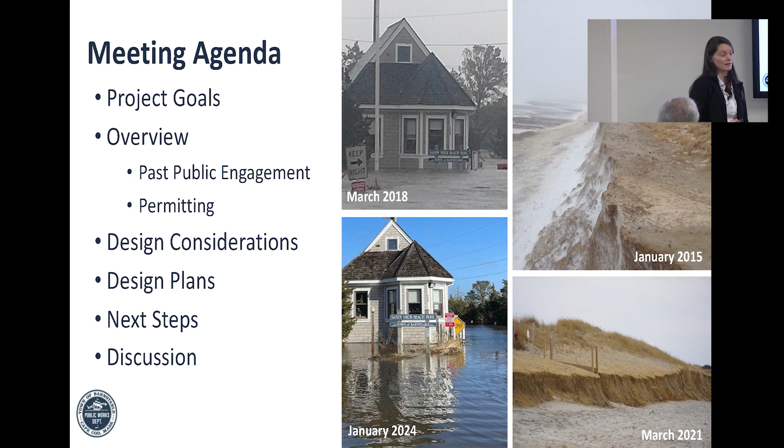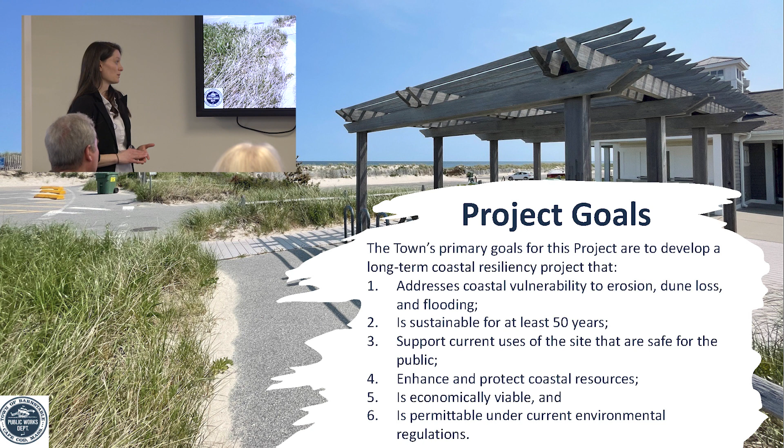So the project goals: the town's primary goals for this project are to develop a long-term coastal resiliency project that addresses coastal vulnerability to erosion, dune loss, and flooding, is sustainable for at least 50 years, supports the current uses of the site that are safe for the public, enhances and protects coastal resources, is economically viable, and is permittable under the current environmental regulations.

We've had a lot of public meetings on this project. This is our 4th one so far. So what we started with was a review of the site's vulnerabilities and constraints, and then we established those project goals I just mentioned to you.

At that meeting, about a year ago this past January, we presented 3 conceptual designs with different alternatives that address the vulnerabilities on the site. One was a stone revetment, one was a partial reconfiguration of the parking lot where we pulled it back a little, but not enough to make it sustainable for 50 years. And the final was a full relocation where we pulled the parking lot back to make it sustainable for at least 50 years against future erosion events and flooding.

Moving from that meeting, we got a lot of comments, largely about traffic flow on the site, where the gatehouse was located, and screening of the parking lot and the way car lights would be facing. Also in that original plan, we had proposed to move the ORV trail from its current location up to the back side of the parking lot. That was something we got a lot of comments on, questioning if that was really a good idea for the project.

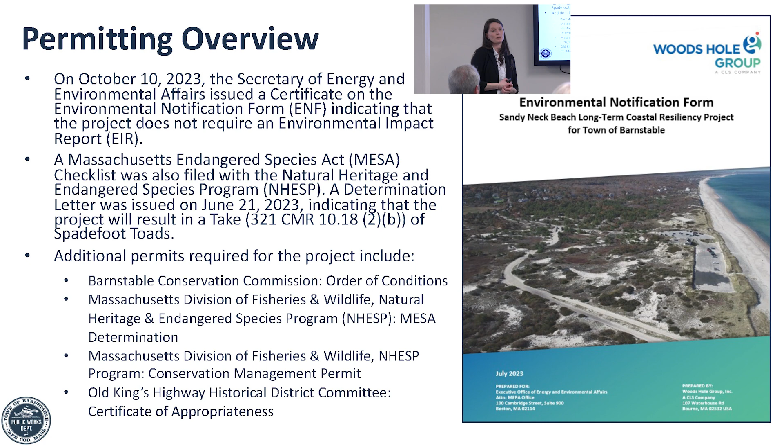So the design considerations for the project at this phase were focused on enhancing pedestrian safety throughout the site, improving vehicular traffic flow throughout the site and particularly the lot, trying to optimize parking spaces to the extent that we could, reducing the amount of impervious area from the last plan we proposed, and decreasing impacts to areas that haven't been disturbed by infrastructure on the site at this time.

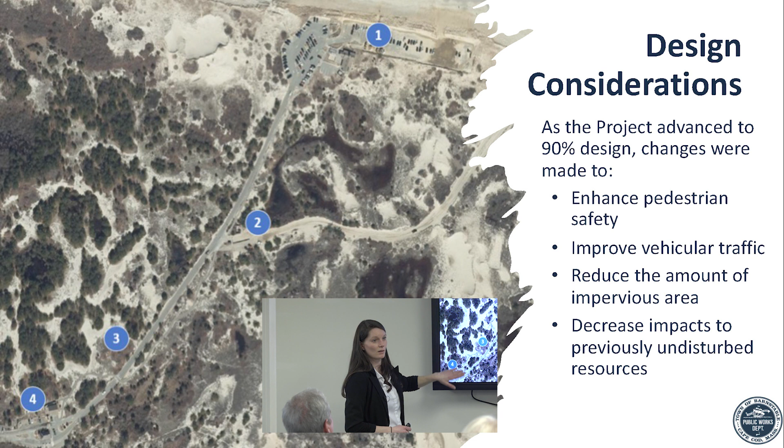The numbers on this aerial photograph just show you the areas we're focused on as part of this work. We have the parking lot up top, the existing ORV trail. This is the area of the proposed new gatehouse, and then this is our existing gatehouse area where there'll still be parking in the maintenance garage.

So this is the latest and greatest of the design plans for the upper parking lot. You might think it looks largely very similar to what we presented last time, but there are a couple details that have changed. Starting in the lower lot real quick, the orientation of the spaces in the lower lot hasn't changed.

But we have proposed in the 2 spaces that run along that green line, the vegetated bioretention swale, which is for stormwater and addresses our Lake Sandy Neck that we have today. It has pervious pavement that will be in those parking spaces, and that's actually something we added as a result of the MEPA permitting review.

Overall, our project was increasing impervious area on the site, and they said, we really want to see you make an effort to mitigate that impervious area with more pervious area. So by adding this pervious pavement, it absorbs the stormwater like pervious ground would. That was something that came out of that process.

Just sticking with the stormwater real quick, we have that bioretention area behind the lower lot. It's meant to take the additional stormwater flow that the swale can't handle. It'll pipe it over to that area so that area can take the additional stormwater flow. It was larger in the last design, but we were able to reduce its size, largely because we are incorporating pervious pavement within the parking lot.

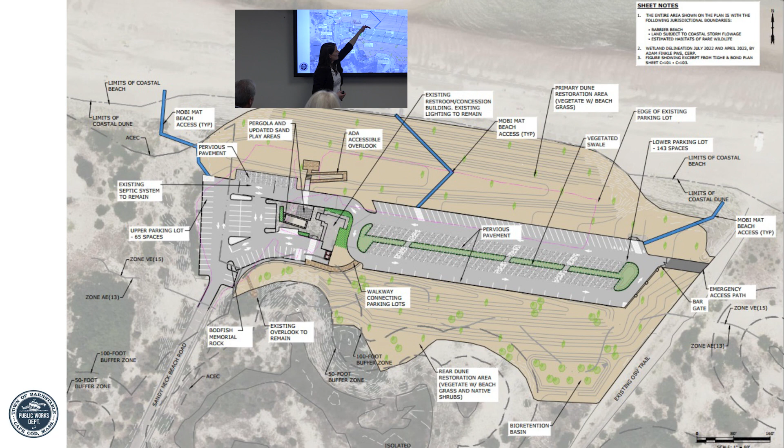Initially, we weren't proposing that because right along this parking lot edge is what we were calling our 50-year limit of loss. That's what makes the project sustainable for 50 years, not losing significant portions of the parking lot to the ocean before then.

So we proposed that because it gave us essentially a traffic pattern that is very similar to our current lot. You drive in and you can go in a circle, or you can go down to the lower lot, come back up and out of the park. It's very similar to what we have today.

And we talked with all of the project team members and some of the regulators and said, hey, this is what we're thinking. Do you think this is not a good idea from the project standpoint? And they actually all preferred it because it had less impact on the site and was reducing impervious area created from this project, so it was viewed as a benefit. But we're also proposing some pervious pavement in that location.

The existing area, pergola, and sand play area around the bathhouse is actually growing in size a little bit as a result of this project, because we were able to move some of these spaces away from that area and create a slightly larger sand play area and patio around that concession stand area.

In a previous meeting, we had heard comments about how pedestrians would get from the lower lot to the upper lot. We were able to add a sidewalk, a boardwalk that will go around the backside of the bathhouse and bring you between the two lots in a safe manner. So these were a lot of the changes that occurred as a result of the permitting process.

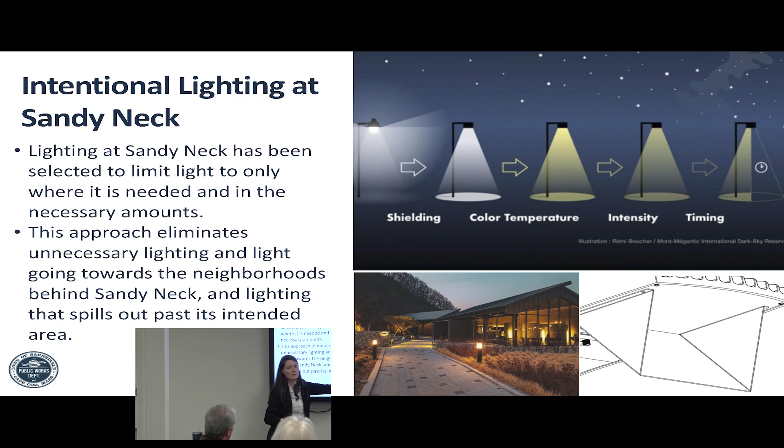So those are the lights we're proposing, along with some light bollards along the raised crosswalk, just to provide really low-level light. Those bollard lights face down towards the ground, just to light up the walkways people might be walking through, similar to these lights shown in the pictures.

So next steps for the project. Taking your comments now, but then ultimately we're moving forward, going to file a notice of intent with the Barnstable Conservation Commission and keep working through those other permits that we need to receive.

By May, July of this year, we anticipate having the 100% engineering design plans and getting our order of conditions for the project. Kind of fast forward after that, we'll be looking at construction phases.

We don't know exactly what time of year restrictions we're going to see for the project, but we are anticipating that due to birds and other rare species on the site, and also just public usage throughout our summer seasons, we likely wouldn't be able to start construction until around October sometime, and that would only be able to go through March until birds come back to the area.

So we're anticipating that we could start the project as early as this fall, October 2024, and continue through March of 2025 as phase 1 of the construction project, where we would relocate that upper parking lot, primary dune, and then build up that rear screening dune.

And then as phase 2 of the project, we would address the gatehouse, and we would relocate the gatehouse to the proposed location and redevelop the ORV entrance area. So this will be a two-phased project over 2 different seasons or years.

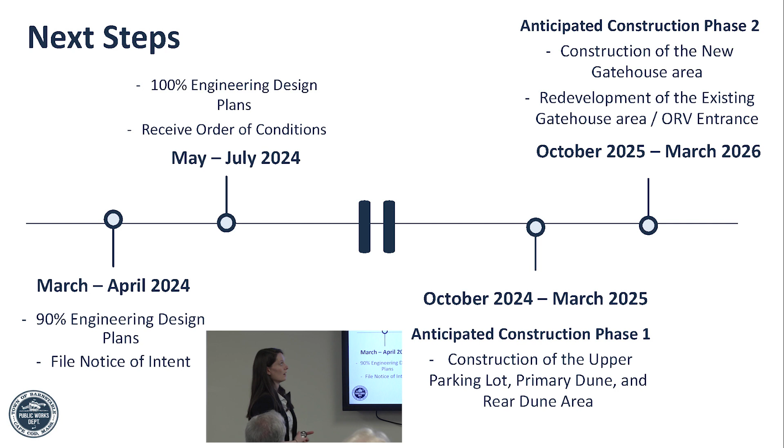And so, this is the last public meeting that we have proposed for the project, largely because we've brought it this far. It's very close to that 100% level. We don't anticipate a lot of significant issues at this time.

So what we're proposing is to keep you all informed through our Sandy Neck storyboard, and also just town public notices. If you guys watch the social media or e-news, that gets sent out through various sources, that would be where you would see the updates for this project. So make sure you've bookmarked our storyboard and you check it often to see what project updates are out there.

And of course, if there's anything significant that would impact users' ability to use the site, that would get pushed through all of the town's notification resources. And so with that, I open it up for questions.

And she's ready. Let's go. You have a cutaway drawing showing the change to the primary dune. Oh, yes. Yeah, thank you for bringing that up.

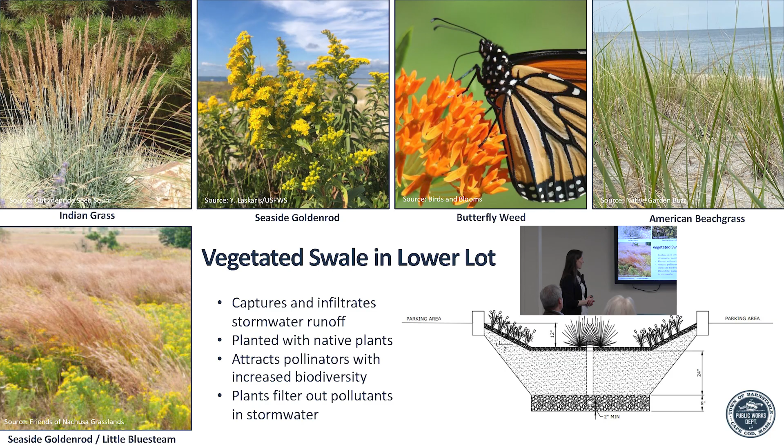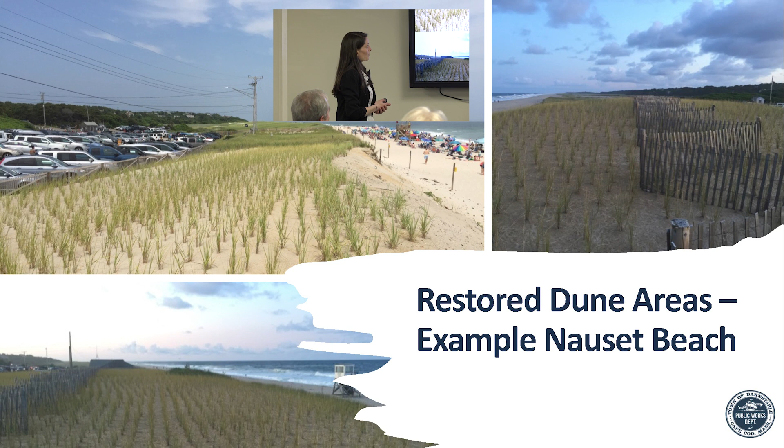And the reason for its proposed height is to be resilient against the 2070 100-year storm, right? That's what we considered making this project resilient for 50 years.

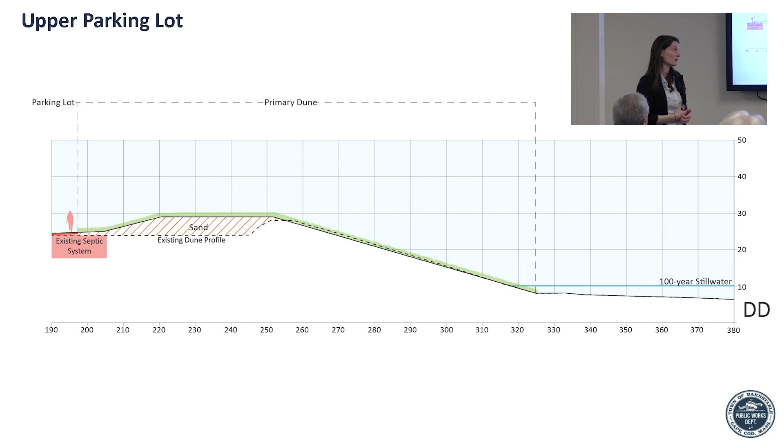Any other questions?

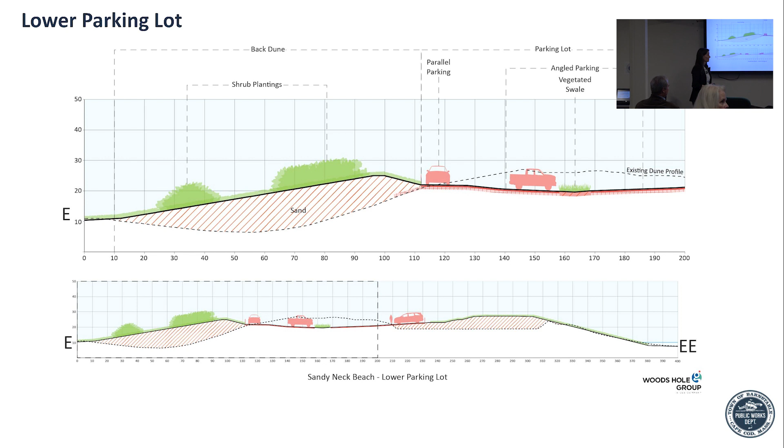The area where the existing gatehouse is right now ponds up with water when it rains hard, or you get an astronomical high tide. I was wondering if any thought was given to running a pipe across the road and bringing some cobble or something, raising the road up there.

You can't see it on this plan because we tried to keep it less busy, but there are 2 catch basins currently down in this area. What we're proposing is that the area be regraded so that the water runs towards those catch basins and doesn't create that ponding issue, because that is also an issue on the site.

Absolutely. This project is meant to make the beach accessible for at least the next 50 years and hopefully beyond. During the construction phase, that will impact the ability for people to be up in the parking lot because there's going to be big dozers and loaders and things moving around. It just wouldn't be safe unless you have a hard hat and steel toes. So yes, it will be open again.

Handicap parking spaces - do you know how many you're going to have? Yeah, so we've got 1 handicap parking space proposed at the gatehouse, so that there's really only 3 parking spaces there. We proposed 1 so that anyone who needs to get into the gatehouse can.

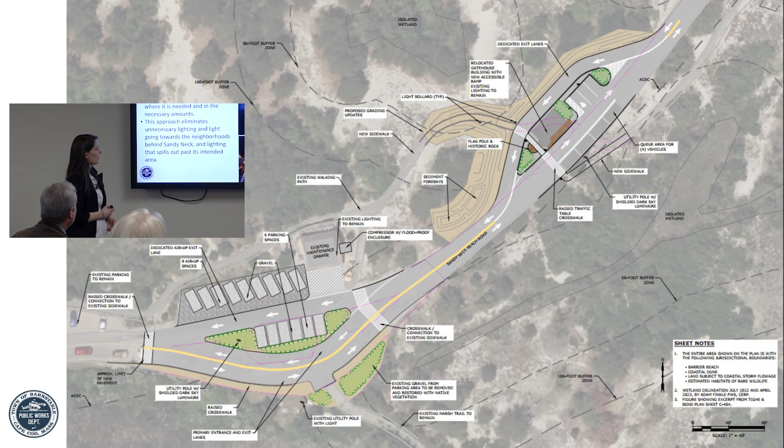And then in the parking lot, we have handicap spaces near the bathhouse, right? And we also have handicap parking spaces in the lower lot. We proposed them down here because this is going to be probably the easiest access to the beach, in terms of the height of that access and the length of that access. So we proposed them in that area.

How does the number compare with what are available now? Good question. I'm not sure how many we have on site, but we are proposing a total of 7 in the parking lot, which, according to our engineers, is the ADA requirement for the number of spaces proposed here, which is about 205 spaces, by the way. That's considerably more than we have right now for handicap spots. Yeah, so she's saying it's more handicapped parking spaces than we have today.

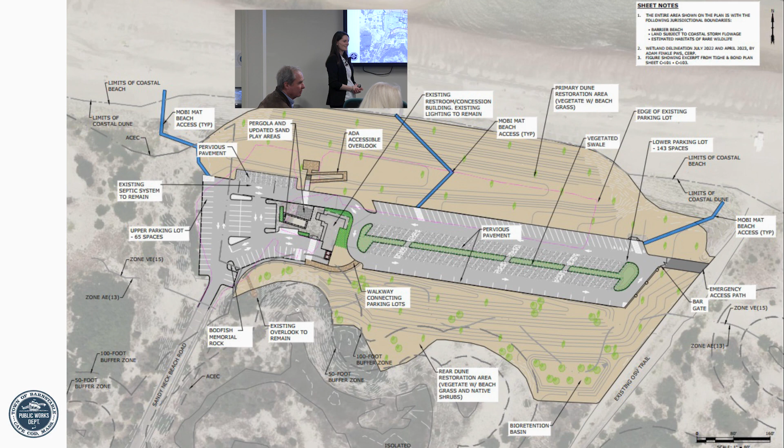Any other questions, comments? I want to thank you for all your work and listening to the public and taking those ideas into consideration and morphing the plan and getting it to where it is. It's great, I think it's wonderful. Well, thank you, that's a great comment to hear.

We have a collection plate at the end as soon as people leave tonight. Yeah.

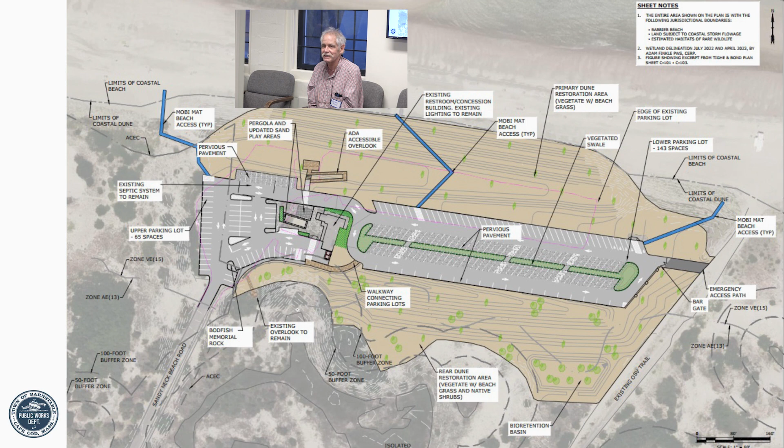I think it's a good idea where you're putting that generator for pumping up in the lower lot behind the maintenance building, because I wouldn't be very happy if it was on the other side, since my house was right there. Okay, yeah, I mean we were thinking about that, and it came up - how do you make an air compressor quiet? Well, that's not really possible.

And if you enclose it too much, that'll buffer it a lot, but it won't work - it'll overheat. But we also felt like it was still good to have it because it's going to help get cars off the beach and off the site, and not take such a long time for the cars to be able to leave. Because right now there's a lot of traffic that backs up just associated with the air-up process on this site.

Anything else? Should I wrap it up?